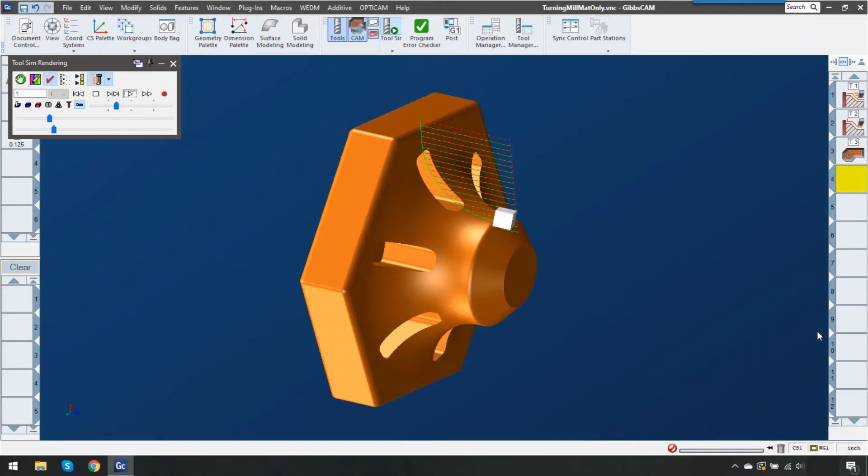This video is going to show the new 3D material only feature in GibbsCAM 14. This feature will calculate the leftover material not just between operations, but between coordinate systems and even between turning and milling operations. We're going to use this example here. So let me get out of simulation and show you how it works.

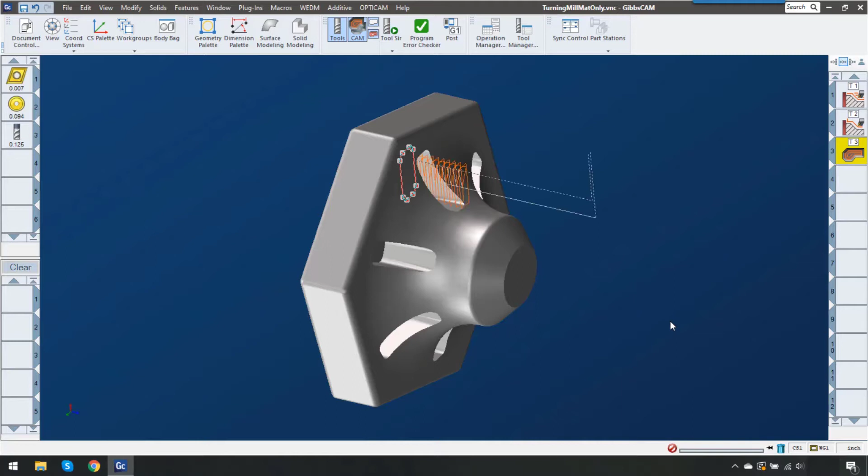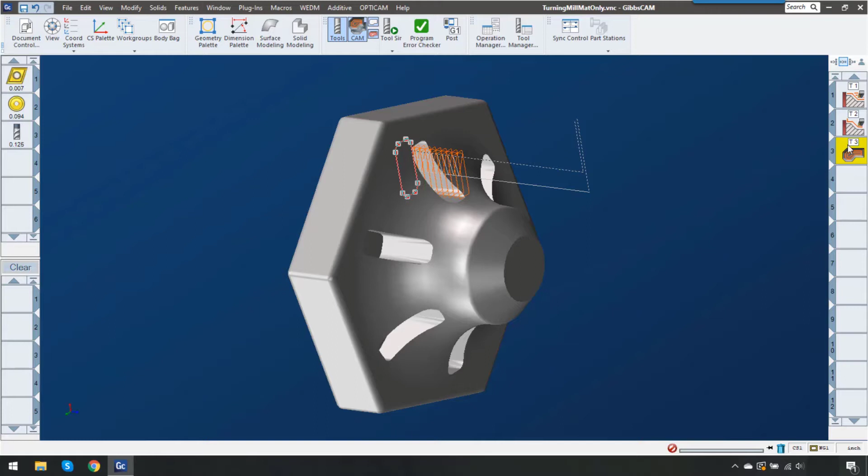So after this part is turned, we're going to end up with a profile, something like this. And because of this profile, you can see that there's going to be a lot of air cutting here to do this pocket. What I want to do is I want to tell GibbsCAM, hey, there was something that happened before this. Let's ignore that material that's not there. And now in GibbsCAM 14, that's really easy to do.

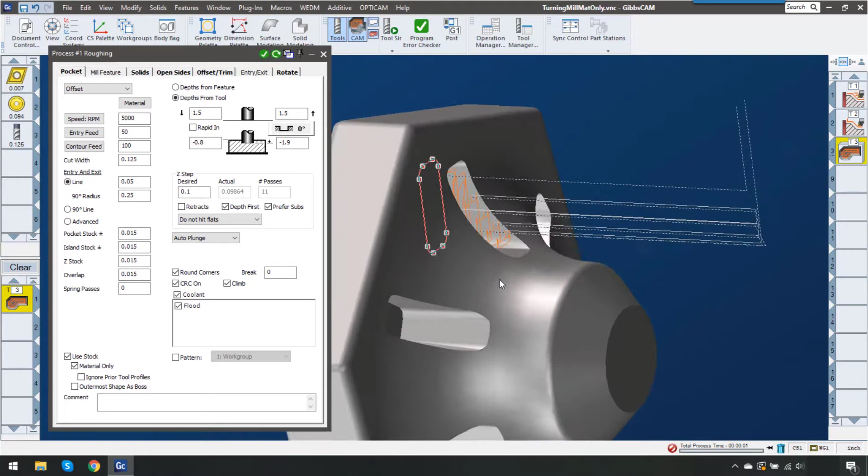So down here at the bottom, we have use stock and just click on material only. This will calculate the leftover material regardless of operation or coordinate system. Now you can see how much more efficient that toolpath is. This is going to cut down on air cutting, which is going to really speed up your cycle time and get parts off the machine much faster.

Now this example was using the difference between a milling operation and a turning operation. Now let me show an example where it's between two milling operations but using different coordinate systems. This milling part, I want to machine on my 5th axis. I need to rough it out and finish it, but the reach on my roughing tool is only about 1.5 inches, and you can see here it's 3.5 inches tall. So I'm not going to be able to get all the way down.

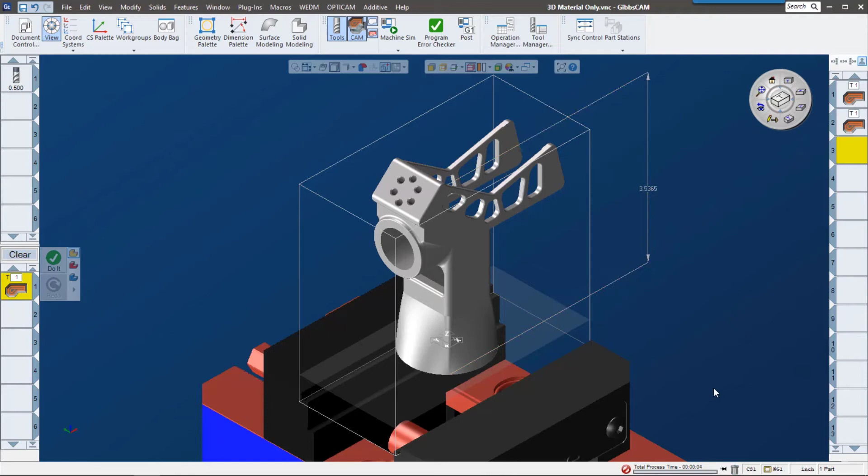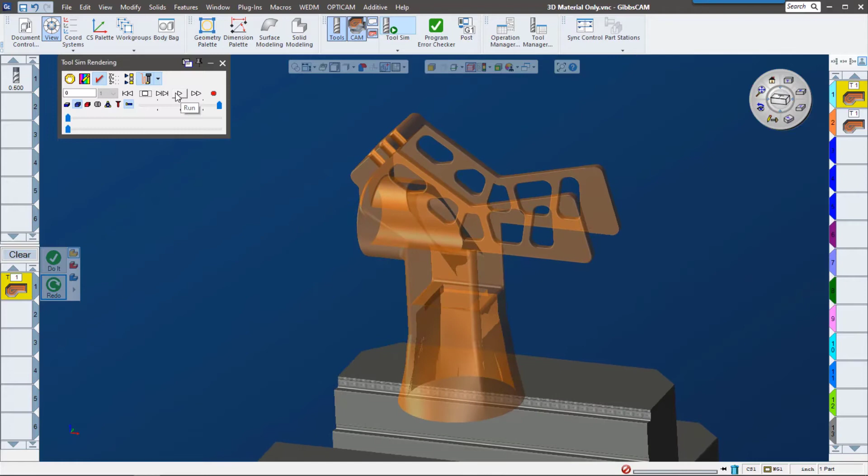Now, the problem is I don't want to have my second tool in this setup have to go through and recut all of the material that it thinks is still there from the previous setup. Now I'll show you an example of that with tool simulation. Here's the toolpath representation from the first tool. Let me continue on to that second tool.

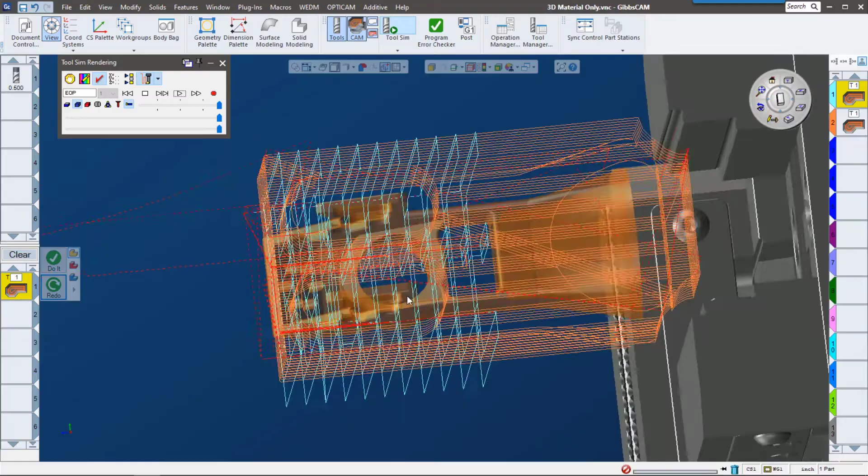So we can see that there's kind of this cross hatching where the two toolpaths actually overlap. If we look at the top view of this, we can see that the second toolpath is actually coming out and trying to clear away the material that's already gone. In GibbsCAM 14, it's really easy to change that. There's this checkbox that says material only. I'm going to go ahead and redo the toolpath.

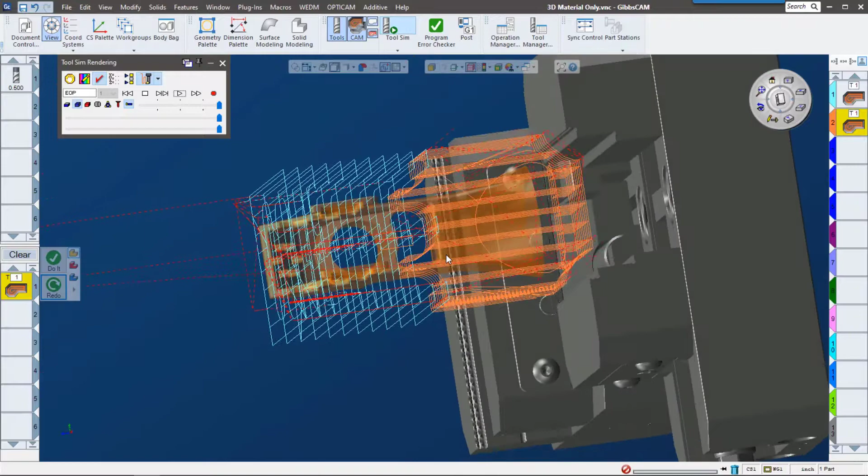Let's go ahead and play it now. Now we can see how that second toolpath only addresses the areas that the first toolpath missed. Let's check this out in Machine Sim. I'm going to go ahead and speed through that first toolpath. So we can see the material that it took away. It took away a good amount of material. Let me back up so we can see the rotation here.

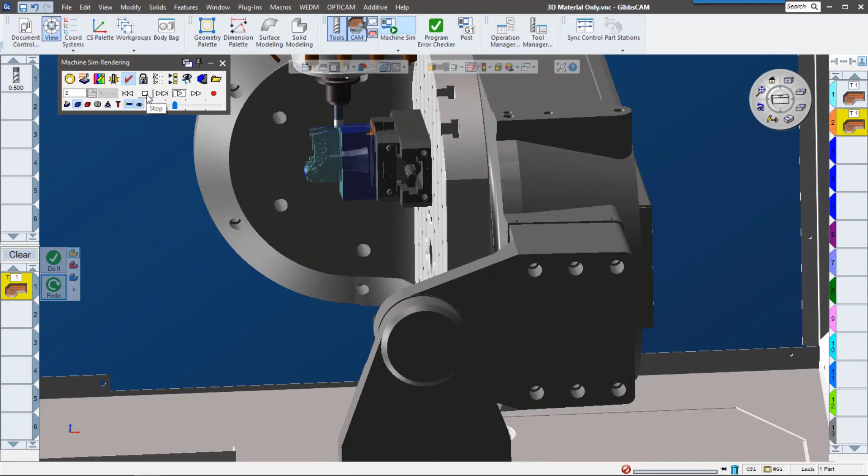So now you can see as I zoom in, that tool is only addressing the material that's left over from that first toolpath.